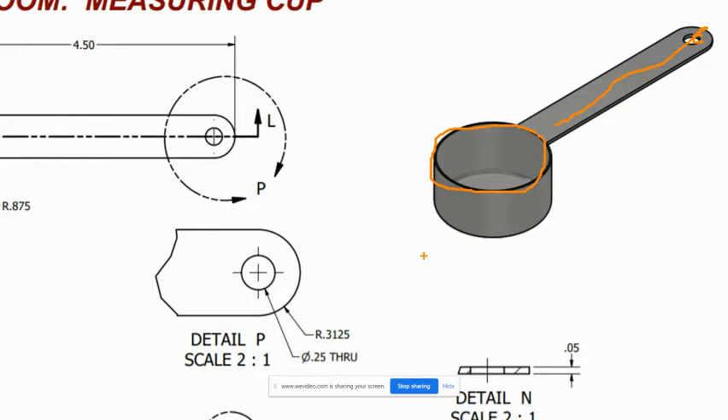Make this measuring cup - there are going to be two main parts to this. There's the part where it's going to look like a hockey puck that we're going to make, and then we're going to shell it out so it's empty on the inside. And then there's this handle with a little hole on the edge. So let's start with the cup portion, and we'll do the handle second.

Over here on Onshape, let's go ahead on the top plane and start a sketch. We're going to use the center point here to center our cup, and that's sort of the top of the cup.

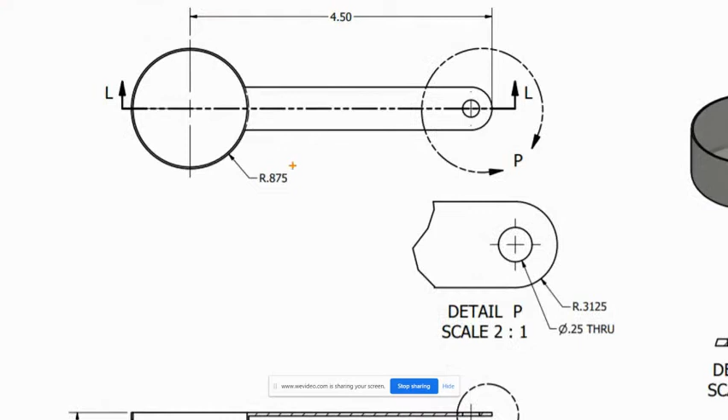Let's see how big it needs to be. Looks like that cup has a radius of 0.875. So we want to come back over here and say 0.875 times 2. There we go. All right, let's finish the sketch.

Now we're going to extrude this down. Extrude it the other direction - we want to extrude down this way, and we want it to go down a certain distance. So we want it to go down 0.875 inches. We'll put that in here: 0.875.

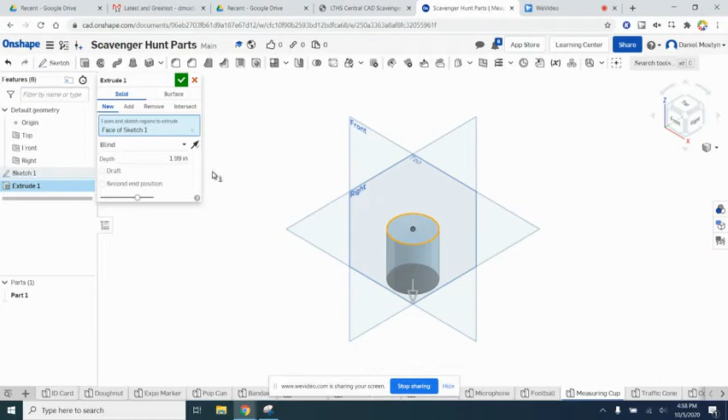That looks perfect. Okay, before we actually shell it, if you look, the bottom of it is rounded - can you see that? You get a rounded edge down here on the bottom. That looks like a 0.125 inch fillet all the way around.

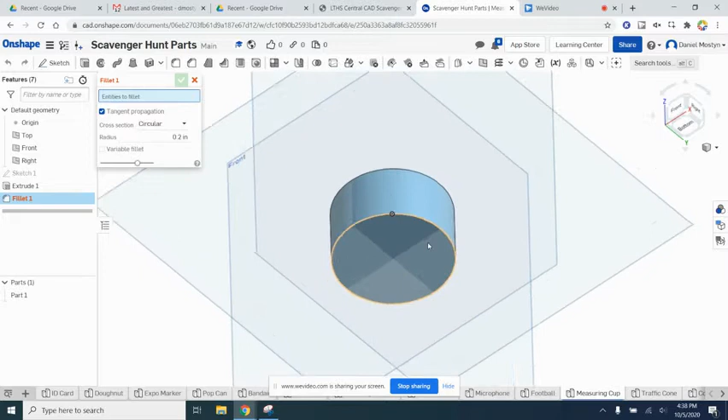So we'll go to 3D Fillet, look at the bottom of it, and select just the bottom. We don't want 0.2 inches - that seems like it was way too much. What was it? It was 0.125. All right, there we go.

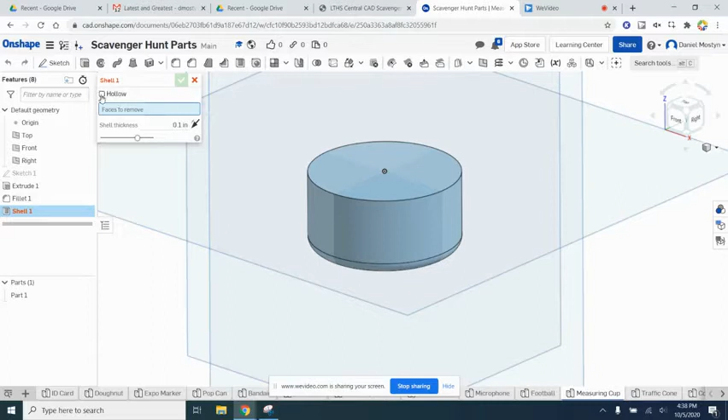All right, so it still looks kind of like a hockey puck, but that's okay because we can shell this thing out. We'll go ahead and not click on hollow, because that'll make the whole thing hollow - we just want to remove the top face.

So we're going to click on the top face, and you can see it's sort of like a little cup now. It's a bit too thick though - right now it's at a thickness of 0.1. We need to change that to a thickness of 0.03. All right, that looks perfect.

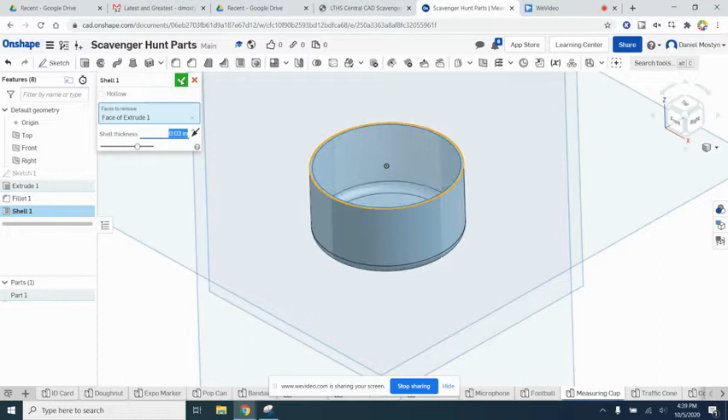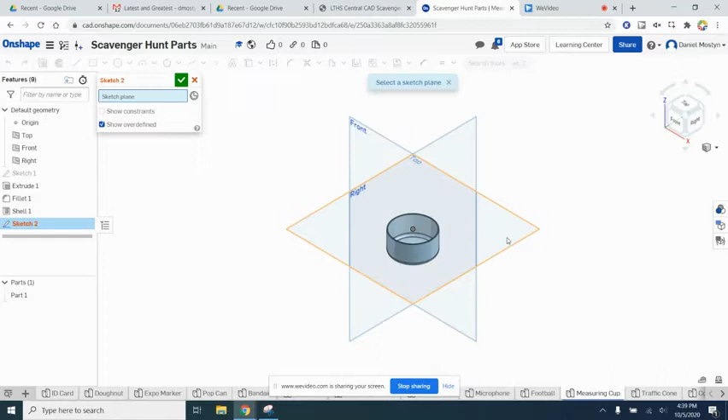Okay, we have the cup portion of our measuring cup completed. The next step is to start another sketch on the top plane, because we want to make sure - you see how the cup is sitting right below the top plane? That's how we want it, because then we can go ahead on the top plane and draw the rest of this thing.

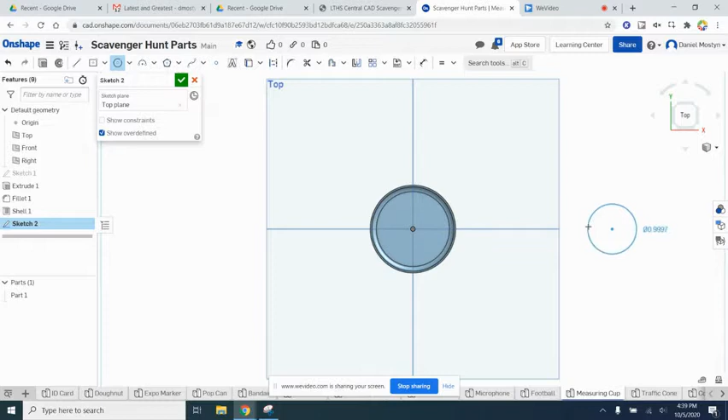So let's look over here. What I'd like to do is make a circle over here with a radius of 0.3125. We're going to draw that circle out here, making sure it's lined up - see that green line? It's lined up with that axis. So that's about right, but we'll come back here. What is it again? 0.3125 radius.

So that will be 0.3125 - was that right? Let's try it again: 0.3125 times 2, because we got to put in our diameter for this. And there it is, perfect.

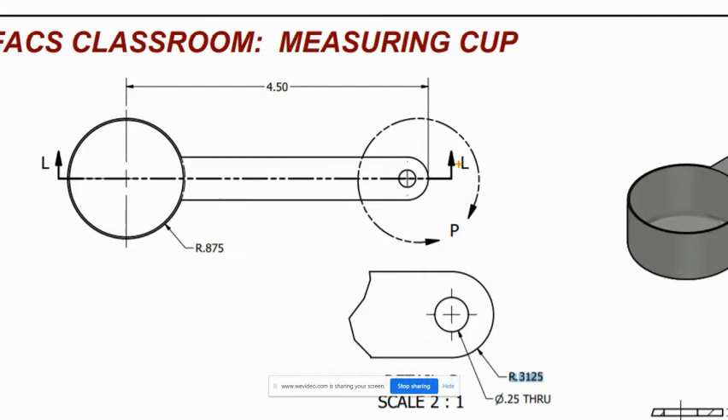All right, something else we got to do is make sure this is the right distance away from the other circle, away from the cup. We can see that the edge of this is 4.5 away from the center of the cup - so 4.5 inches away. So what we'll do here is put in a dimension.

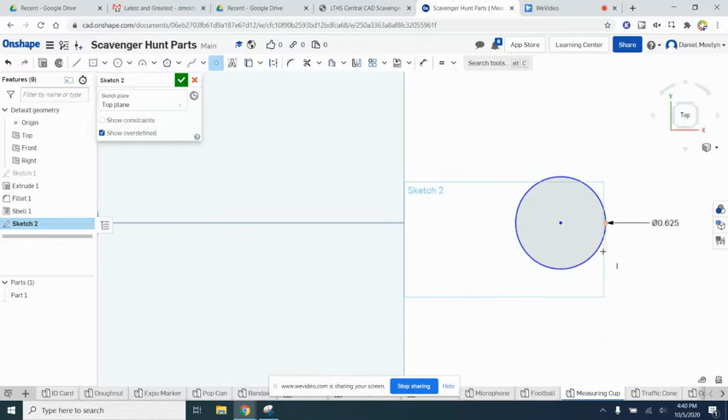Let me put a point right here - this will help me dimension. I'm going to take from the center point and go outward, hovering - that's my point. I want that point to be 4.5 inches away from the center, which is the origin. What was it again? 4.5 - ooh, I was really close. 4.5, all right, there we go. Now we're in the right spot.

That circle's locked in. Let's go ahead now and make a line. This line we got to be careful with - hover here, go upward, we want it to be a tangent line. That line is tangent, and we want to make it so you can see it's snapping - it's horizontal, that's good, until we hit the measuring cup.

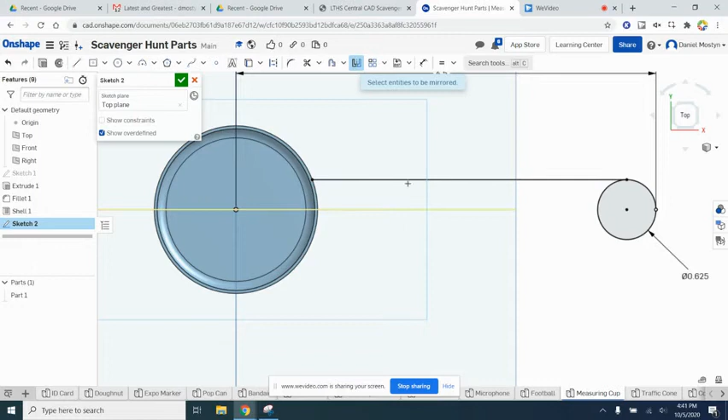I'll use a mirror because I'm lazy and just want to make sure it's right. There we go, perfect. The last thing we want to do is make a little arc, from one side to the other. How big is that arc?

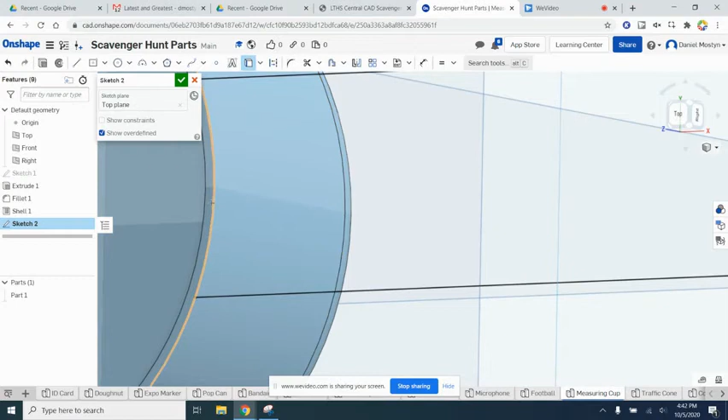Well, that's one thing where we might have to use this projecting geometry. So what we want to do is use the Use button here. Let's highlight this outer edge - we've got to make sure it's this one. There we go, all right, so that's the outer edge.

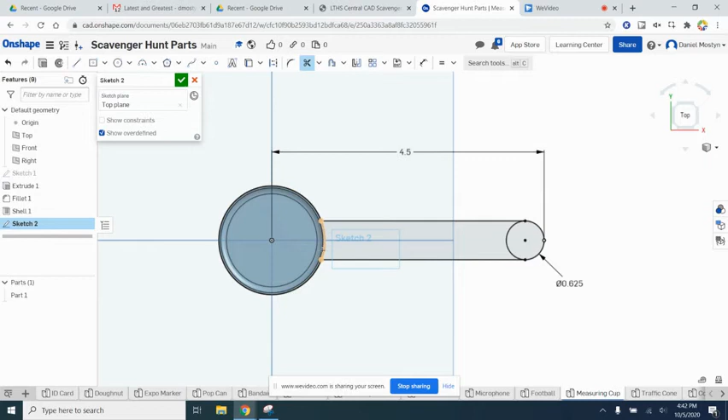Reorient myself a little bit. So I think right now, since we used Use, it actually drew a line in for us, and now we have a complete grayed out area that we can extrude when we want. We didn't actually have to draw in this arc because it's there now, since we used the line that was already there on a different sketch - the line that was on the three-dimensional portion of the cup.

All right, enough of that. Let's go ahead and cut out this portion - we'll trim that using the trim tool. That's looking pretty good. The only thing we can do now is put the little hole in on the end. Let's see how big that hole is.

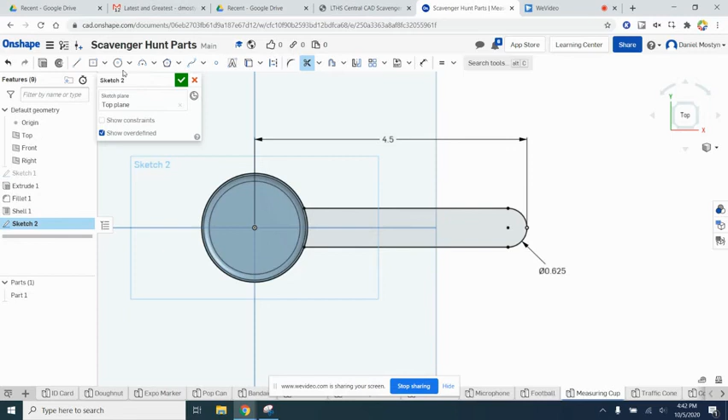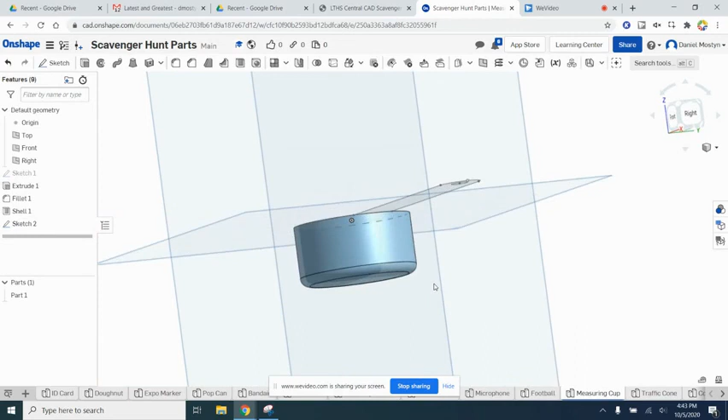Looks like that hole is 0.25 inches in diameter. There we go, and I think we're ready to finish our sketch now. It was a lot of work for one little sketch there, but we got to make sure it was lined up properly and that we have the right curves going on. All right, let's extrude.

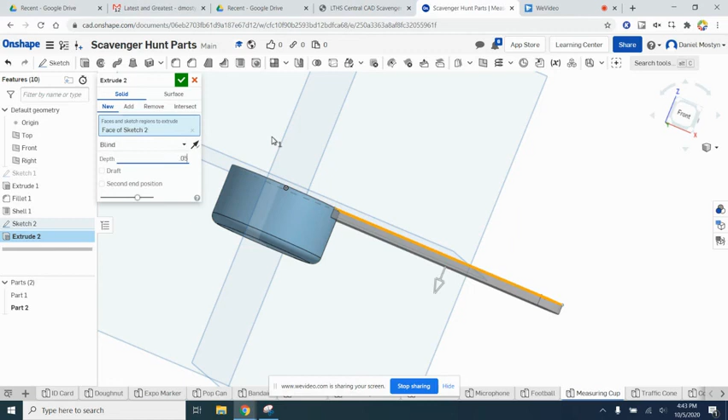We're not going to extrude upward because we want this to be extruded downward, so it connects to the rest of the cup. The dimension is right here, 0.05. And there we go - that should do it. That is our finished measuring cup.